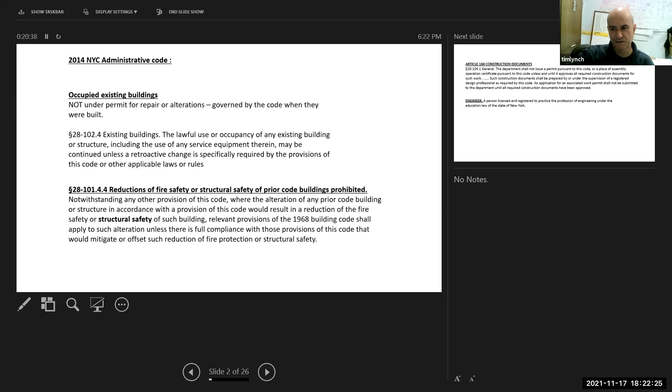If you're doing a development, you're not supposed to impact the stability of the adjacent building. That's why I put it up there. You are protected under the administrative code to say the developer is not allowed to diminish the structural safety of the existing building. It is governed in the code.

So here's another thing, construction documents. We don't issue permits on a development unless we get a set of drawings. And once we get a set of drawings, we'll issue them for permits. It's in our code. So a general contractor cannot start work on a development unless there's a permit. So we've got that too, okay? And then there's a definition of an engineer. Now I'm going to roll into these in a minute.

Inspection of existing buildings. Here's an important thing. When a developer decides he's going to hit up a site in the middle of a block or adjacent to existing buildings, it's important to do inspections of the adjacent properties. And we always have trouble with that because tenants say, I don't want anybody in there. The landlords next door who could be renting the building, you may find that the building is actually not well maintained. The existing building is not well maintained and they don't give access because there may be illegal occupancy. Now, I'm just being frank with you about this issue.

When a developer gets to a site to develop in a downtown area with existing buildings on both sides, lot line construction, there is a code mandate for them to do observations of the adjacent properties. Most of the time they don't get access. In our code, it says, make sure these guys get access. Okay? And somebody has to do an assessment of the adjacent buildings. Now, I've put that up there as a slide.

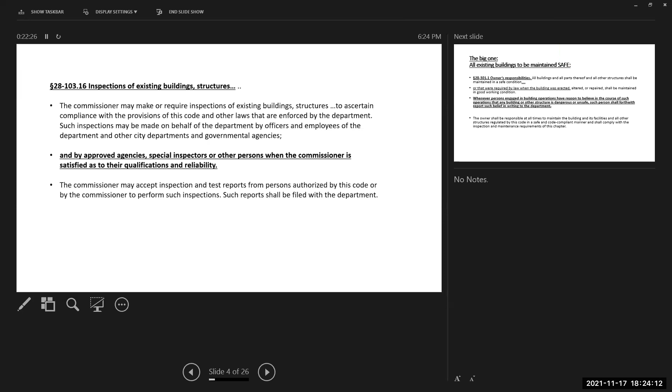Go ahead. I'm sorry to interrupt you, but there's a lot to get into here, and I appreciate your presentation so much. I just want to ask a question here. I know in regards to support of excavation and foundation work, there are specific requirements that are determined by the engineer in terms of optical and vibration monitoring. I'm going to get to that. But yeah, I'm sure you will. But here it says the commissioner may make or require, but it doesn't say that it's required. Or am I missing something?

Okay, you're missing something. This is the issue with the existing buildings. Not the developers need to get in. That's governed under the building code. This is an administrative code provision for the existing building. It's a complementary code provision that says if we need to do observations of the adjacent building and the department needs to do them, we need to be able to get in.

Not the developers' building code requirements that are statutory under chapter 33, under chapter 16 or chapter 18. This is if a landlord says that I don't want anybody going in because they're governed by a building code next door. We have an administrative code provision that allows us to do access.

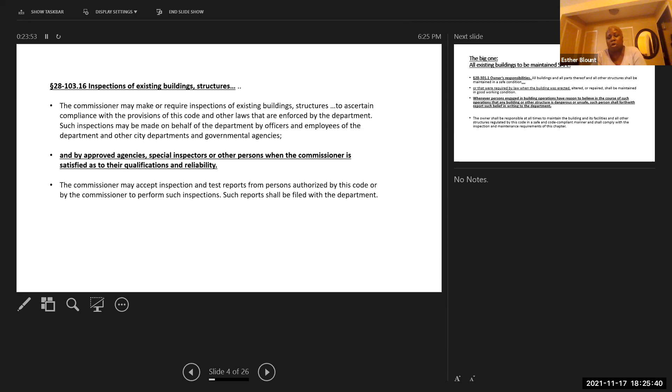And sometimes that's necessary because what we do is we get reports of damage and then nobody allows us into the building. Can I say something? Go ahead. I know people who have let developers in, and they take pictures. You know, in a brownstone, you might have a little crack here, a little crack here, and then they use that against the person to say the building was already damaged. That's why a lot of people are not letting people in.

Okay, I got it. And you're not wrong. I'm just saying what we have. These are the statutory requirements. I will tell you the merits of each of these as we go along. And Mr. Lynch, bear in mind, the big thing that we have you here for tonight is that we do a lot of these as Landmarks Preservation Commission applications. As a matter of fact, when you're finished, we're going to have this specific thing come right up on that application. You're welcome to sit in and listen.

And what we've been getting are a number of LPC applications where they want to do work on their building, but the work, especially at the rear or on the sides, going into the backyard or on the side, will affect the buildings next door. And that's what we've been getting more at this particular committee. So just bear that in mind. That's one of the problems that we're facing on this matter. Thank you. Go ahead, Mr. Lynch.

Mr. Gordon, I have to speak about this. What is being discussed is way over anything that the community board ever gets involved in. We don't know all of the machinations of whether the contractor gets into the apartment or the next building or not. That's beyond the community board. We are focused on what insurance the developer and the house that is getting the work have to protect the adjacent houses. That's the focus. I'm going to get to that.

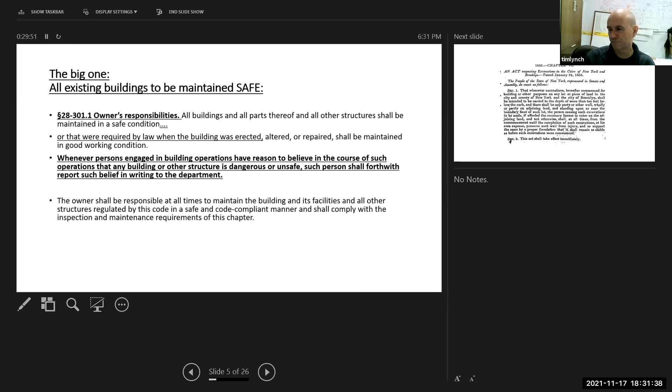Okay, but the neighbors have to live with the collateral damage and the insurance claims and the litigation and the damage to the building and his tenants complaining. All of that stuff goes with that. Okay, so that's kind of a good one.

In 1855, an act respecting excavations in the city of New York, which was Manhattan, and the city of Brooklyn, which went over to Myrtle Avenue. This is directly from the state code for a building code of New York and Brooklyn, which was Manhattan and Brooklyn City, before the city consolidated, and Brooklyn City was Brooklyn City, Flatbush, Flatlands, Gravesend, and New Utrecht. That was Brooklyn City. So everything west of Myrtle Avenue.

Whenever excavations hereafter commenced for a building or other purposes on any lot or piece of land in the city or county of New York and the city of Brooklyn shall be intended to be carried to a depth of more than 10 feet below, and there shall be any party or other wall wholly or partly on adjacent land and standing upon, if afforded necessary license. We've had statutes regarding collateral damage to neighboring properties since 1855 in Brooklyn.

It says it in the code, and I put it there to realize that this thing has been around for collateral damage to adjacent buildings since 1855. It says here, preserve such walls from injury and so support the same by proper foundations that it shall remain as stable as before the excavations were commenced. That's from 1855. So even in 1855, developers were mucking up existing buildings in Brooklyn, and they were doing it in Manhattan again.

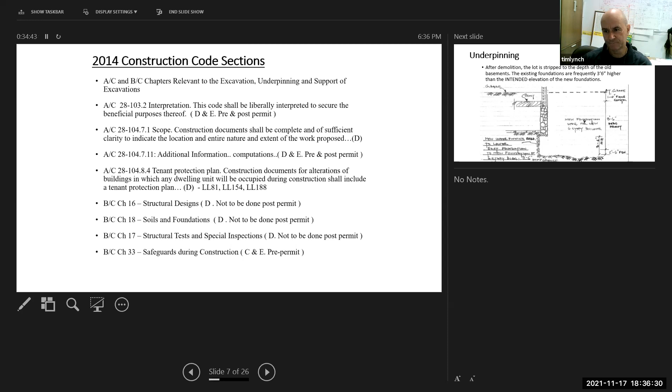However, there is a statutory obligation to protect the adjacent properties. The snag with the adjacent properties is they're 150 years old. There's a lot of material degradation. They've been heavily used. There's very scant code on how they were designed when they were built, and they're very brittle. So what happens is a relatively minor amount of activity on the construction side causes this disproportionate collateral damage to the adjacent building. Okay, so we're going to keep going now. That is the issue that you have.

That is a section through an existing building with a vacant lot next door, where the excavation next door is deeper than the depth of the adjacent building. Everybody visualize that? What ends up happening is the new site undermines the adjacent building. That's a classic underpinning problem. The adjacent building is not as deep below the sidewalk as the new property. So what happens is they have to lengthen the depth of the foundation wall of the neighboring property. That's the issue in a nutshell.

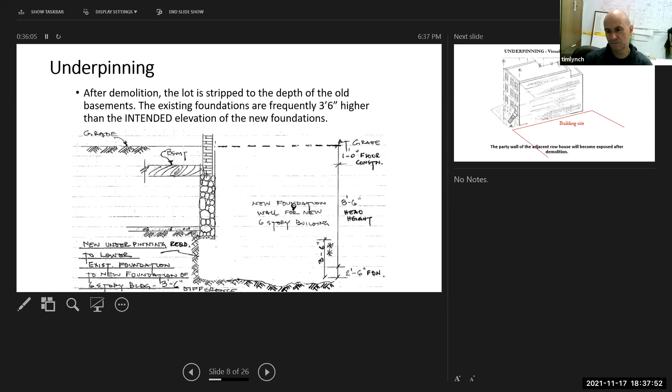The buildings on the adjacent lot line are not as deep as the excavation site where they're putting the new building. In 1855, they had the same problem. You have existing buildings at 9 feet below grade. The new building needs to be 12 or 13 feet below grade. The problem is the neighbor needs to be extended down 4 feet. That's underpinning. Everybody visualize that? Okay. And so here's another one. So there's one, that's the building site.

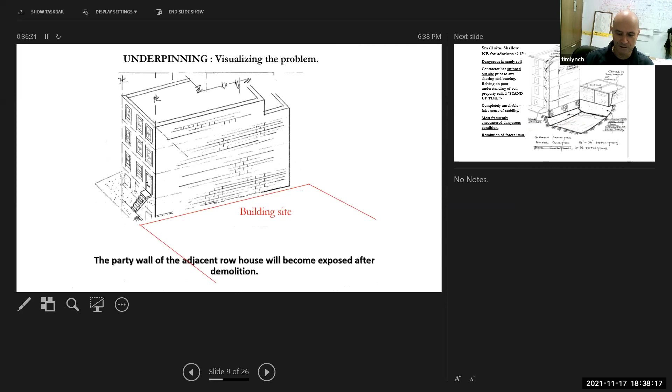Development removes a building mid-block, exposing the side wall of an adjacent stoop property. Everybody okay with that? Demolition is right there. You get the development site, you get the neighboring property. So here's the problem. The development site needs to excavate lower, and they undermine the foundation wall of the adjacent property. Now, I'm just showing you the illustration of why this occurs. There's a methodology not to do that.

It's called underpinning. What you do is you lower the adjacent foundations by 4 feet every 8 feet. So you do 4 feet at a time, 4 feet, you skip 8 feet, you do 4 feet. There's a methodology to it. But the other one you've got to watch is those high garages at the back of the sites. They are extremely frail because they generally are very, very high on the site, and you have a very deep excavation underneath them. So that's a classic Brooklyn development, right there.

The developer has to lower the site to get the new building onto the site. Now he has to do it for a number of reasons. One, there's no stoop in buildings anymore, so it's not up to parlor, down to basement. People do not want to carry babies and shopping and bicycles and groceries up 6 steps to get into a stoop. They want to walk in at grade, or wheelchair access or perambulators. That's why the buildings are at grade now. There's no up to parlor, down to basement, where you actually get 2 entrances to the street. The problem is now the adjacent building is high on the site and the new building has to be low.

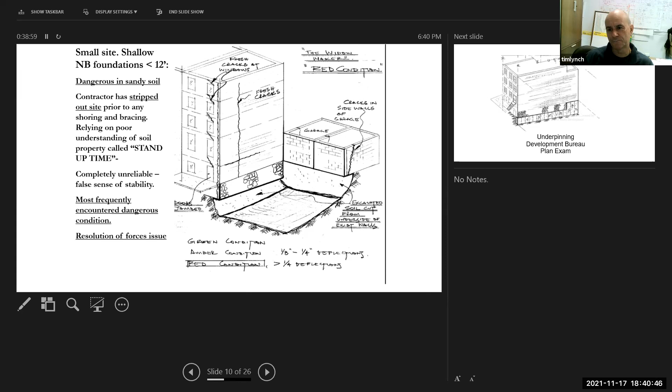The neighboring row house is at 9 feet below grade because it's a stoop row house, up to parlor, down to basement. What they did is they pulled the building up 4 feet out of the ground and gave a stoop to the parlor floor and then a walk-down basement. It meant you got 2 entrances at street level. The basement had its own entrance and the parlor floor had its own entrance, but it made it very difficult to get in and out of the buildings. You're up and down stairs all the time. And that's how these foundations are done, the underpinning. They lower the foundations of the adjacent buildings by blocks of concrete every 4 feet.

Everybody okay with that? You can see the sketch. Doherty, can you see that sketch? It's okay? You can visualize it? Oh, yeah. Okay.

So I think what would be super helpful is for you to help us understand what we need to tell the people who come to us, what they need to do to prevent the widowmaker, right? Okay. So you're getting to pre-construction surveys, but we need to go from there. Right. I'm going to get there.

First of all, I just want to go through the statutory requirements of what we have, because a lot of people don't understand that these things exist. Homeowners, community boards, what we do is we get a lot of this stuff after the damage occurs. We show everybody what the code provisions are. This is all about public safety. The building code and the administrative code, maintaining an adjacent building, is all about public safety.

The developer does not want to be in a financial or a business relationship with the neighboring property. It's just not where they need to be. Most of the foundation and excavation in Brooklyn has significantly improved since we started this work in 2005. We very rarely get foundation issues with Brooklyn anymore. Because why? Every 6 months we would campaign the designers, we would do site visits, we would do industry outreach, and the building department invested a lot of money dealing with this issue with underpinning. So it's significantly improved now.

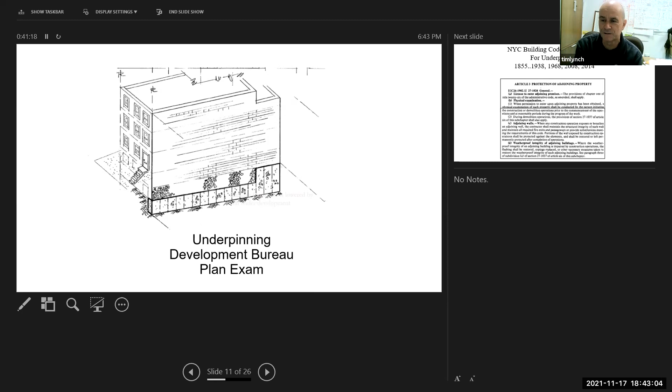When I started this 17 years ago, we were getting 2 to 3 incidents a month. Now we get maybe once a month or whatever. And the designs have significantly improved, but the adjacent buildings themselves are quite frail and they do move around. When you transfer load from one foundation system to another, you get what's called foundation settling. So the buildings absolutely move. Even if the work is executed well, the adjacent buildings move. It's called foundation settling, okay?

So this is what we have, protection of adjoining property. This has been in the code since 1855. License to enter an adjoining property, physical examination. When permission to enter upon an adjacent property has been obtained, a physical examination of such property shall be conducted by persons initiating the construction or demolition. So it's in the code. It's a statutory requirement that the developers must do an evaluation of the adjacent properties.

Okay? They have to weatherproof them. They have to maintain the structural integrity of them. And they have to do all this type of work. The problem is we don't have a huge amount of statutory provisions to tell them what to do. We give them laws to say you have to comply. Why? Because there's multiple versions of the adjacent properties. This happens to be the 1938 building code and the 68 building code, but there's a 2008 version of this as well.

Now, you can do underpinning and it can be done correctly, and you can raise a building and you can support a building. So there is nothing new under the sun about doing underpinning. They've been underpinning buildings since the Romans. Okay, so the work can be executed correctly. And I'll talk a little bit about that. And that just happens to be an example of one where the site extended underneath an unreinforced masonry building.

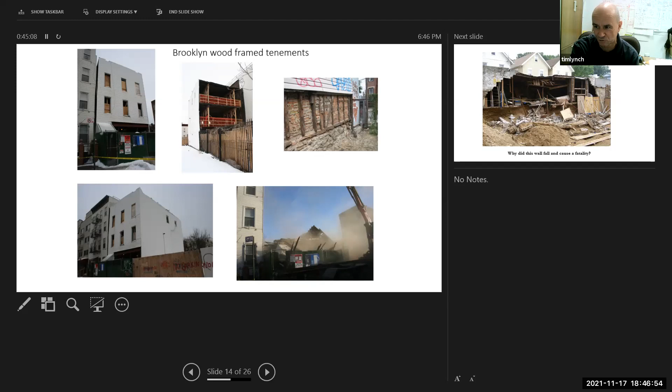Underpinning problems. Why? The mechanics and the engineering of underpinning is challenging. Basically, you've got to keep the existing building in equilibrium. The vertical loads have to be in equilibrium. The horizontal loads have to be in equilibrium. And any rotational loads on a wall have to be in equilibrium. And it's usually overlooked by the engineers, the rotational load from the soil. So they build this foundation wall and the soil actually imposes a lateral load onto the pin and it knocks the pin into the site. So I'll go through that in a minute.

So I want to go back here to the existing buildings. Existing buildings have to be evaluated correctly. And the engineers for the developers have to be afforded the ability to do an evaluation. What happens is if they don't do the evaluation, they make some crazy assumptions to get them through so they can start work on their own site. What ends up happening is, not having evaluated the adjacent buildings, it turns out the adjacent buildings were quite frail. And then they made an assumption about underpinning them, lowering the foundation, and the assumption was wrong.

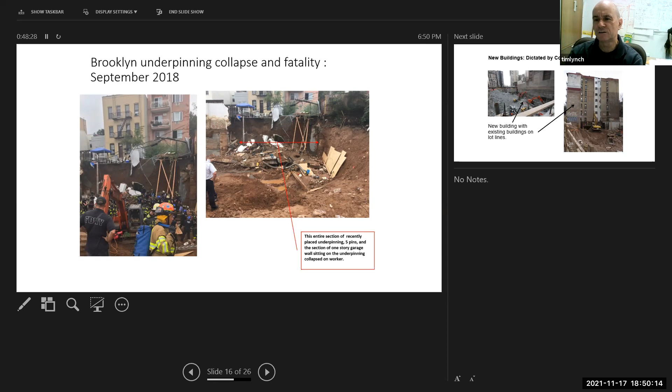Okay? So the new buildings are dictated by codes, but the existing buildings on the adjacent site, the codes that govern them are very scant. And that leaves a lot of interpretation for the engineers when they're doing the stabilization and the foundations. So the new buildings coming up out of the site, they are governed by this enormous, fabulous code that we've had since 2008.

The evaluation for the adjacent buildings next door: the engineers need to have knowledge of how those unreinforced masonry buildings were put together. And the other issue is they have to be able to evaluate them to determine, is it suitable to do the work next door to them? And that's the first question I asked the architects. I said, before you said to everybody what a fabulous idea to dig out a 20-foot hole on this construction site, did you think it was safe to do that with the adjacent property?

And many times they said, yes, we did the evaluation. We've entered into a license agreement with the neighbor. We've told them that we're going to get some collateral damage. The repairs will be repaired. And we'll do this, that, and the other to restore the safety of the building. It happens a lot. It happens more now than it used to 10 years ago, where the neighbors and the developers end up in a license agreement.

Okay? So they get access through a license agreement. They get to underpin through a license agreement. Collateral damage is covered in a license agreement. But believe me, the problem is, you have to get these things in motion before the construction starts. And those license agreements can be time consuming. And we don't cover them in our building code.

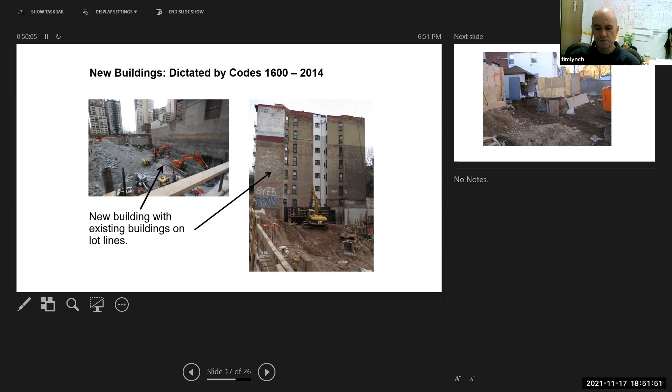Okay, and here's another one of these unsafe conditions where the site was being excavated. This actually is a Brooklyn job, and we lost somebody on this one, which was a one-story concrete block garage at the back of the site. And they lost a wall underneath that, and there was a guy on the site. So it's in nobody's interest to get injuries or collateral damage. It's just not where everybody wants to be. Nobody's the beneficiary of this. It's not what we want.

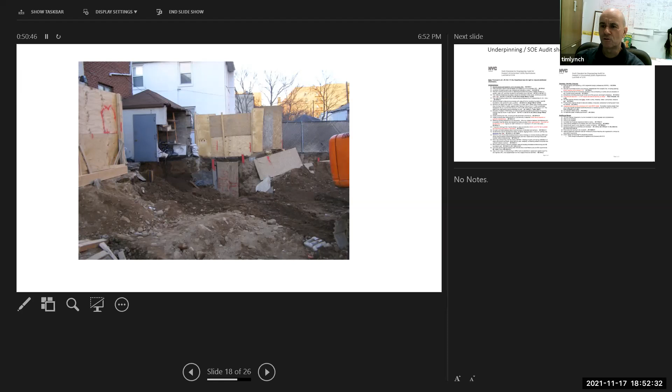People get hurt, the development gets shut down, there's vacates in the neighboring property, there's insurance cases, there's litigation, there's prosecutions, there's stop work orders. It's not where anybody needs to be. Okay, so we have audit sheets. We write down audit sheets. We give our plan examiners audit sheets. So we have sheets that list all the technical requirements that are required to get a job through plan exam.

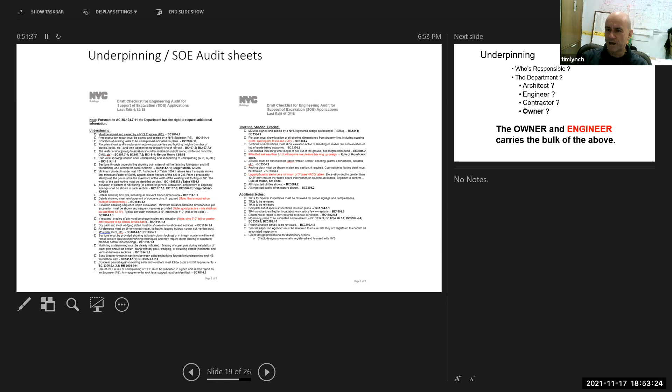It's complicated because you need to know what's going on the lot line with the adjacent building. Is it a row house? Is it an old-law tenement? Is it a wood frame tenement? Is it a taxpayer? Is it a 6-story new law tenement? Is it a commercial building? Is it a firehouse? Is it a school building? Is it one of these things? So there's a lot of variation on the construction site. So yeah, you need to have some knowledge of that. So we have lists of questions that we ask developers and their designers.

So who's responsible for an underpinning job? The department, we have a piece of it. The architect for the new building, they have a piece of it. The engineer, the contractor, and the owner. The owner and the engineer carry the bulk of this work. Okay, so if there's collateral damage and there's underpinning and there's support of excavation for a neighbor to get a new building in the middle of a block with lot line construction, the bulk of the liability for that work is on the owner, the developer, and the engineer. This is an engineering issue. Okay?

Construction underway under permit. So we have specifications, duties. Chapter 16, structural design, analysis. So we've got specifications. We tell the engineers, don't forget, you've got to do this, that, and the other, and you've got to do it properly, and you've got to use your calculators, and you've got to use your computers. You know what building they're going to get right? They're going to get the new building right.

The problem is applying that engineering theory to an existing 19th century building. It's a challenge. For most of the engineers, it's difficult to figure out how those buildings were built and if there were alterations made to them and how frail they are and how well maintained they are. Everybody okay with that? Good. There's design. It's in the code.

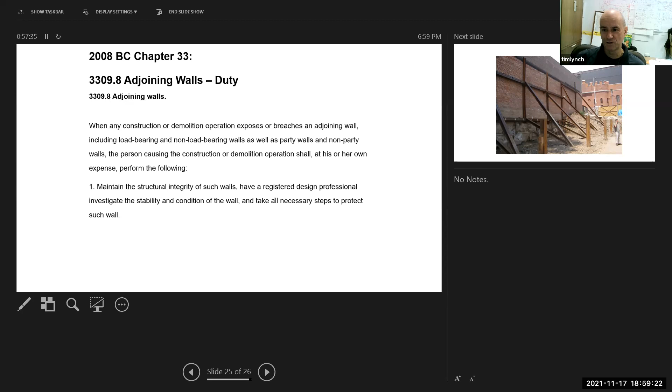Okay. And there's some bracing that we put on a wall not that long ago on a job in Brooklyn. Look, I gave you a summary of some of the provisions required for existing buildings. I didn't go through a huge amount of stuff because it's late. It's a 1-hour presentation. It's difficult to present this stuff to non-technical people. That doesn't mean you won't understand it. But late in the day to do a 1-hour presentation that's highly technical about a special project, I'm giving you an orientation on it. What I'd like you to consider is the following.

1, note that there are code provisions that govern the work. 2, the building department is full of experts, but we don't like turning up on a job when a lot of damage has occurred already. 3, make sure that the neighbor affords access, because it's strategic for developers saying they never got access to the buildings. Now, there's 100 reasons why they don't get access. There's a tenant in the way. The guys are away. The landlord's away. This, that, and the other.

It's true, and I get it, but it's a problem because if you don't afford access to do an evaluation, regardless of whether there's cracks there or there's not cracks there, the problem is it's difficult to leverage our code on enforcement saying you were supposed to do a pre-construction survey, you missed this condition over there and it got messed up during construction. And then the developer turns around and says, I never got in. So that's an issue. I'm not saying it's the right issue.

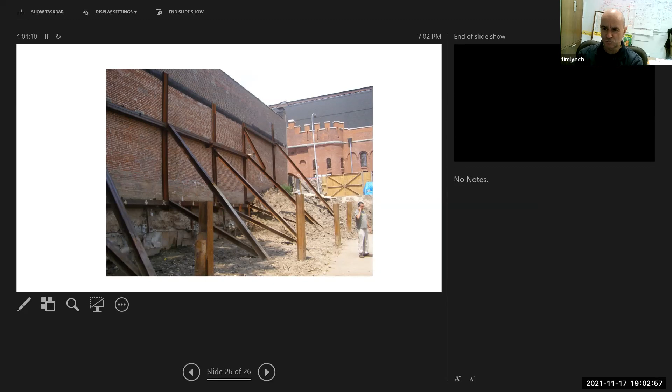What I offer you is thought process, and come back and do a targeted conversation about things specifically you want me to talk about, which is the landmarks preservation requirements, TPPN 10 of 88, which has some statutory requirements for monitoring and observations, and some other technical specifications for how much a building is allowed to move or what happens when an adjacent building moves. I think it's a lot to do in one meeting, but I'm willing to do it in a second meeting when you have time to digest what we spoke about, if that's correct, Carl.

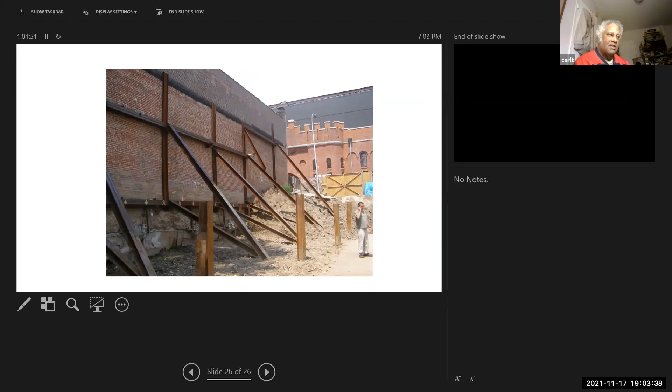Yes, thank you, Mr. Lynch. Exactly. We'll consult with Caroline Church, perhaps to get you for a second, because our focus is mainly on the landmark LPC applications. Again, we're going to have one coming up and you're welcome to sit in and watch and listen and see how we do on it. But it is a key thing, because that's one of the things we've been getting more recently: make sure that the owners, the applicants, are carrying out their duty, as you're saying, and at the same time that the neighbors are protected by the codes you've laid out. So right. I think those are things that are most helpful.

And I think we should probably have a specific landmark preservation lecture or another talk, and perhaps Caroline Church can set up another one with you for one of our future meetings, so we can really focus on that and know how to deal with those problems as they come up. We do get neighbors coming in saying, oh, his extension is going to knock my building, or affect my building. So that will really help us a lot.

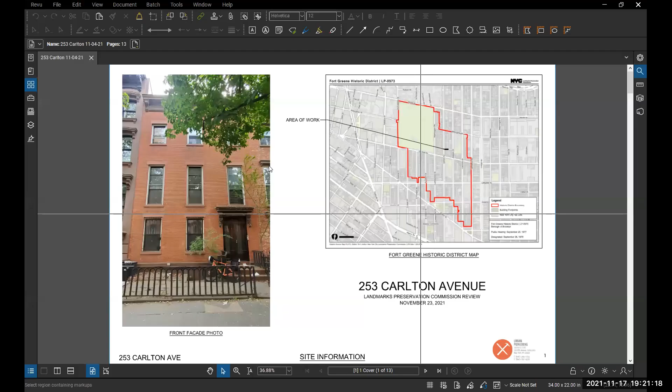Hi, I'm Jim Hill from Urban Pioneering Architecture, the architect for 253 Carlton. I assume at this point I should be able to share my screen and begin the presentation. Okay, Taya Mueller, can you help him to share his screen? Can you all see my screen now? Yes, go ahead. Great. So I'm going to just correct one minor bit of the description that you gave of Carlton.

The violations are not DOB violations. They are landmarks violations, work without a permit. I'll touch on them in a minute. Going to what I thought was the premise of the previous presentation, community involvement: we did speak with Rosario Sinisi, the president of Citizens for the Responsible Neighborhood Planning of Clinton Hill and Fort Greene. She shared the presentation with the Society for Clinton Hill and Fort Greene Association LPC reps.

I did speak with Ms. Sinisi after she reviewed it, and she felt, and I believe she's dialed in here, she can correct me if I'm wrong, that it didn't need further support. She had no adverse comments about it.

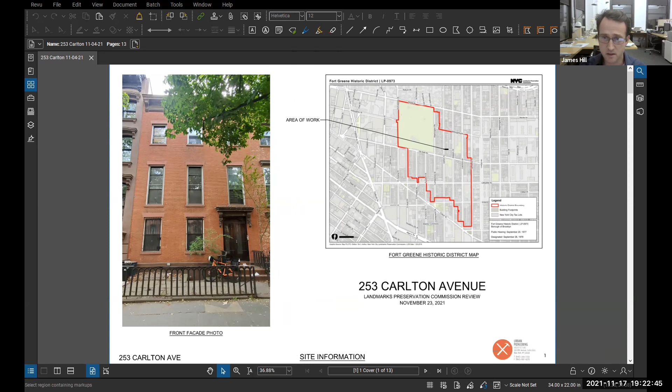So getting into it, here we are, the existing building. According to the landmarks report, 253, which is this one here, retains much of its original detail, whereas its sister building, come on, computer, there we go, 255 to its right, has some additional details that were added.

So the actual conditions, original conditions were somewhere in between. However, the landmarks violations that have been discussed are not part of this presentation. The owners have put money into escrow accounts to address all of these items on a staff level, and they will be taken care of as a separate application that will be carried out while work is underway here, and will be a requirement for sign off from landmarks on all of the work.

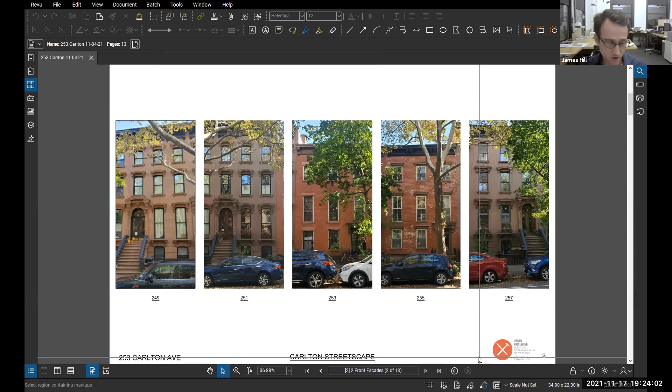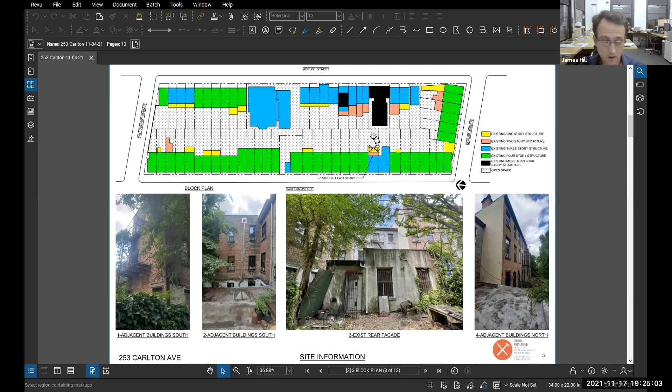So here you can see the existing extension, 1 story on the left. You can see the adjacent buildings on either side. On the left side, on the south, extends past our main building. So you can see on the right where we have the proposed, the 1-story extension matches the existing extension's depth. The second story steps back to align with the existing building to the north. And you can see we have a gap between the side of our building and, I don't know if you call it an extension, but a larger part of the building that has a side court to the south.

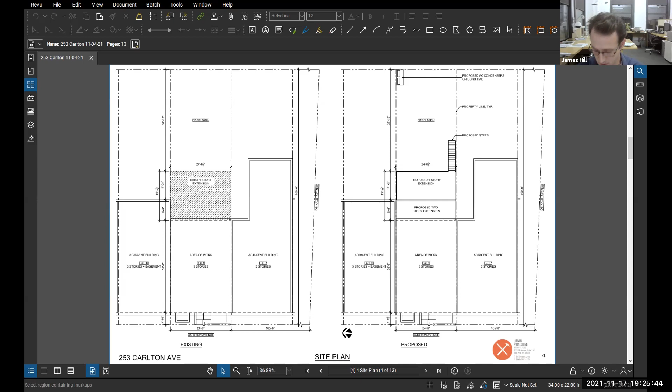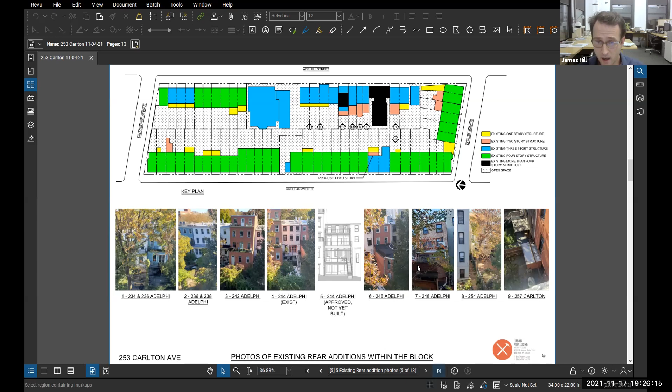Here are other examples of those extensions. In each of these cases, these are all existing extensions that we were able to photograph just on the Adelphi side of our half of the block, with one immediately down on the side in Carlton. You can see in the middle, 244 Adelphi is one that's been recently approved, has not yet been constructed. And I'm going to zoom in on that one just because it's a very good recent example, similar in scope to ours, except they are 2 stories high at the full depth, and then a 3rd story at a recessed depth, and then their top windows, top floor lines. So while it has been approved at a larger scale, it's a pretty similar approach.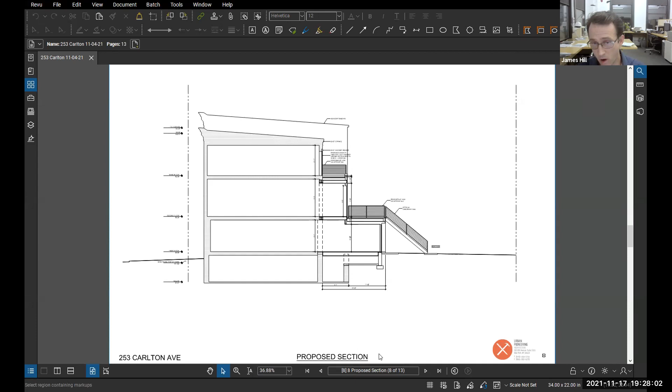The sections showing the existing building and the existing extension with the adjacent building to the north, the larger building in the background. You can see here it's specific to Mr. Lynch's proposal. Actually, we have kind of a funny little extension to the cellar that was already part of the original build. And our extension, the existing extension here, the proposed extension here, you can see we're maintaining that. So we are not proposing any conditions which require underpinning of the adjacent structure. Here's more of a side-by-side comparison.

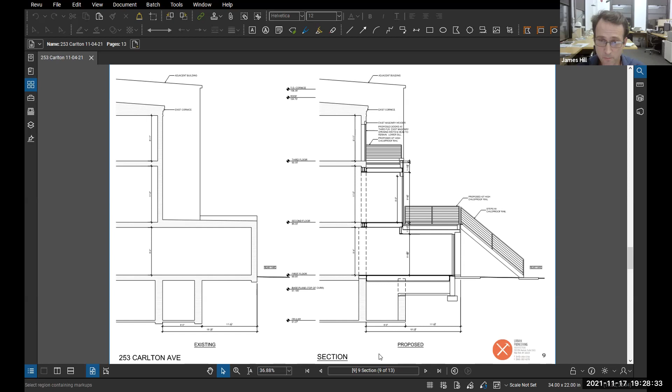And you believe that the work you're going to do will not affect or interfere with the neighboring buildings? Correct, correct. No, there's no addition on top of the existing building. It's all in the back where there is none. Existing and proposed, existing on the left, proposed to the right. So you can see we've got basically a crawl space on the right underneath our extension so that we can minimize foundation depth.

Again, existing and proposed, the first floor, which is at ground level. First floor here is what most would really consider a basement or garden level because there is no stoop on this building. So the old rickety extension in the back gets pulled off, we build a new one, and then we have bedrooms and stuff downstairs. Up on the second floor, which in a traditional brownstone would feel more like the parlor, kitchen in the back, terrace on top of the setback of the roof.

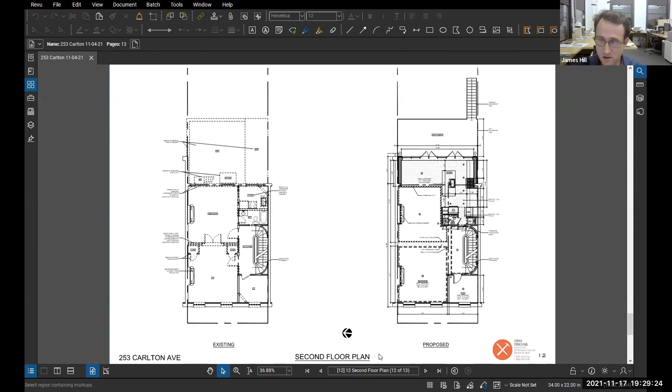Third floor, bedrooms, and that's really it. We'll be using new materials, obviously, but will the materials blend in with neighboring buildings and the community? I'm sorry, it's a little hard to hear you. Well, I'm just trying to think of the materials that you'll be using for the extension.

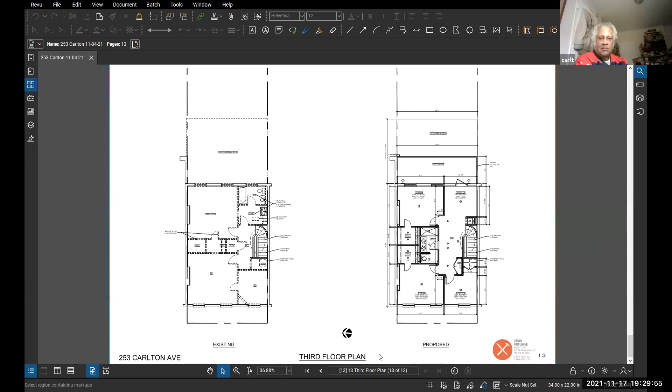So if we go to the rear elevation, the top floor, the existing brick, I don't have a good picture here, but the existing brick had been painted. That paint will be removed and the brick will be restored, and then the extension will be stucco. It will be a white stucco. Okay. So you're keeping as much of the original as possible. Right.

Okay. Any other questions from committee? Yeah, I have a question, Carlton. Why are we reviewing this? I made a site visit to that location. I walked around the block. I cannot see anything. You can't see extensions on Carlton or on Adelphi Street. It is solid. You cannot see anything from the back. So why are we talking about materials? We can't see it.

Even with that, they came to us, some people will see it. No. LPC required it. You physically cannot see it, Carlton. Physically. Make a site visit. Apparently Landmarks is requiring us to review this. So I appreciate that you can't see it, but we have to actually review it. Review what? You're gonna talk about materials that you can't see? Ernest, it's been required. Judy, what's your question? I was answering Ernest's question. I think it has to do with the amount of existing material being removed and replaced with glass.

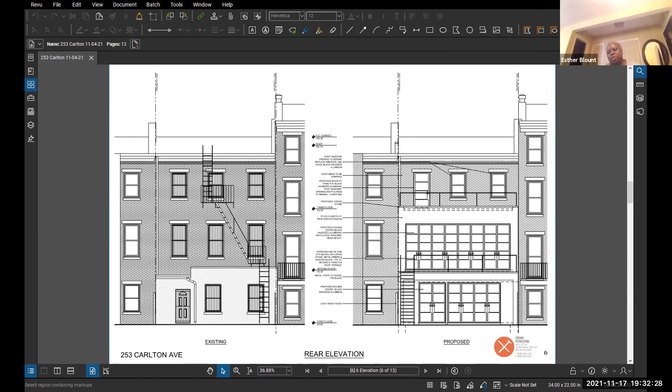I'd like to make a motion to approve. Like Mr. Hill said, Fort Greene Society, the community does not have any objection. All the stakeholders have no objection to this project. So I'll make a motion to approve. I'll second. Okay. Second by Hajra Ali. Any comments or questions on the motion?

May I just ask, the architect actually volunteered to respond to the question about why we're reviewing. Mr. Hill, if you want to speak to that, I'd like to give you a moment. I'm happy to. I don't feel compelled to, but if people are interested, the reason given me by the staffer was that staff level has a specific set of criteria that they are allowed to approve. And this does not meet those criteria because of some very specific items, things like on either side of the doors in the rear, the brick piers, if they are less than 24 inches, I believe, the staffers aren't allowed to approve them.

Most specifically, it had to do with the 50% of the block. We could have easily modified the rear design in any way to meet all the requirements, but because not 50% of the existing buildings have rear extensions already, that alone means that it goes to commissioner level and thereby you. Thank you, Mr. Hill.

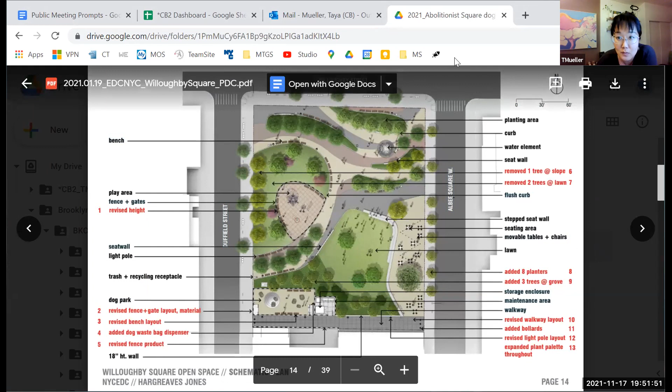Just to show you what the current topic is. So this white square is 227 Duffield. These little gray squares, these pavers, represent a very narrow walkway. And this beige square right here is the proposed dog park, as you can see in EDC NYC's own diagram. And Mr. Rothblatt's opinion, which he brought to the committee, is that it is inappropriate for a dog park to be situated above buildings and historic sites of significant national interest. I hope that was an okay summary. I think it's a very good summary. Thank you, Taya.

Taya, I'm sorry, in the letter that you sent out, it says it's up to the committees to determine if we want to give a letter of protest. So are we being asked? I know you said one committee already gave one. Should we, land use, be voting on this now? That's what I want to know.

Good question. You do not need to do that because your colleagues in the YECA committee already, actually unanimously, supported this letter of protest. So the full board will have an opportunity to vote on it at the December 8th general meeting. Now, the note that we shared with Mr. Rothblatt is that we know just from walking by on the street every day that the ground was already broken last week. So December 8th may or may not be too late for a letter from a purely advisory committee.

Mr. Rothblatt is aware that the community board does not have the authority to issue a stop order. So he is also pursuing with the Mayor's Office of Community Affairs and a contact at Brooklyn Borough Hall. So if this topic is of interest to you all, he has made his contact information available. It's in that letter that was shared with you.

Taya, I did read the letter. This is John Dew. What I wasn't clear about is why did he take so long to submit it, given that these plans were approved for over 2 years now or so? I can't speak to that because Mr. Rothblatt isn't here. He has been very persistent with the office and we have been in communication with him at least as long as almost 2 years now that I've been with the office.